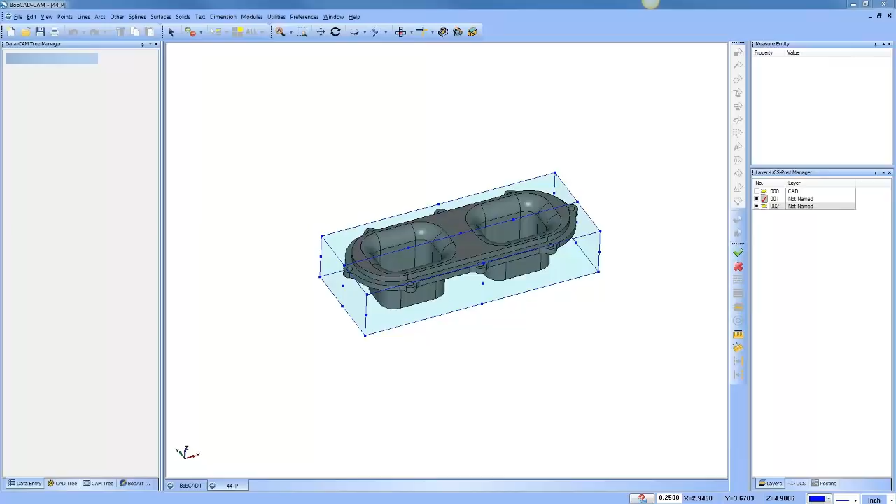The goal of today's webinar is to learn the basics of 2D machining or 2D milling.

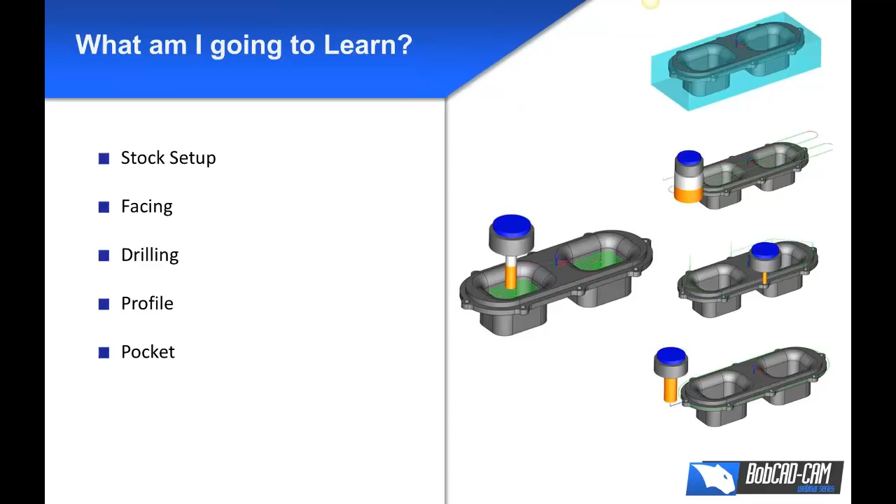We're picking up part 2. We did the wireframe to solid webinar, then we did the 2D milling last week, but we kind of ran out of time, so I want to spend a little more time this week. With BobCAD, you can always expect fewer steps, better cuts, and more profit.

While I'm getting my screen set up, why don't you give me a little shout out? I have Erwin here from New Jersey. We have Doug, thank you so much for joining us from Seattle. We got Rick in Tampa, Larry in Illinois, Reginald out of San Diego, Tom in North Carolina, Ron out of Pennsylvania, Mike, Dale, Vic from Ohio. I appreciate each and every one of you spending time with me here today. I know you guys are busy, and time is money, so I appreciate your time. We got Jamie from Austin.

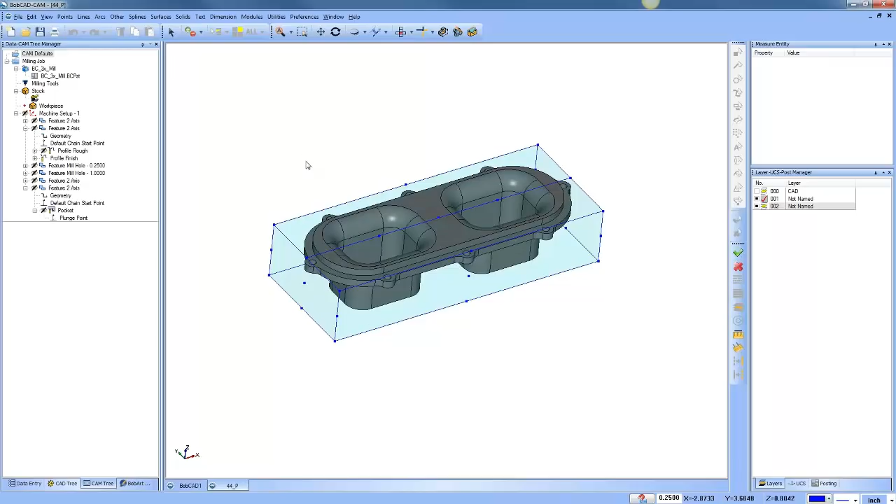Okay, so where are we at? What I'm going to do is a little review here. I'm going to take our model, copy it, create a new file, and paste our file in here. Okay, so we have our model. Again, if you want to rewatch the CAD webinar for this, if you request it, I'll make sure to email you a copy of the first stage where we created the wireframe and turned this into a solid.

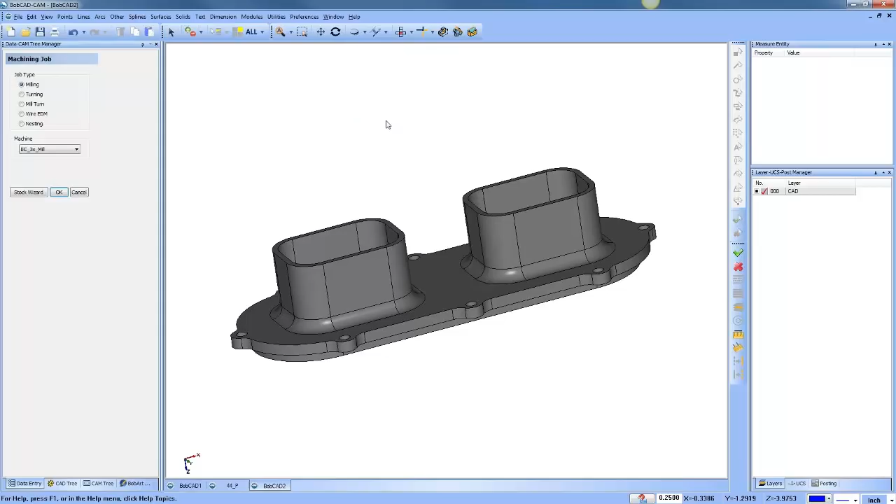So again, we're talking about 2D machining features. This part has some pretty prismatic type shapes - pockets, profiles, radiuses - not super complicated geometry, but always a really good place to start when you're getting familiar with the program and learning about its workflow. If you start with 2D machining, I think that really helps out.

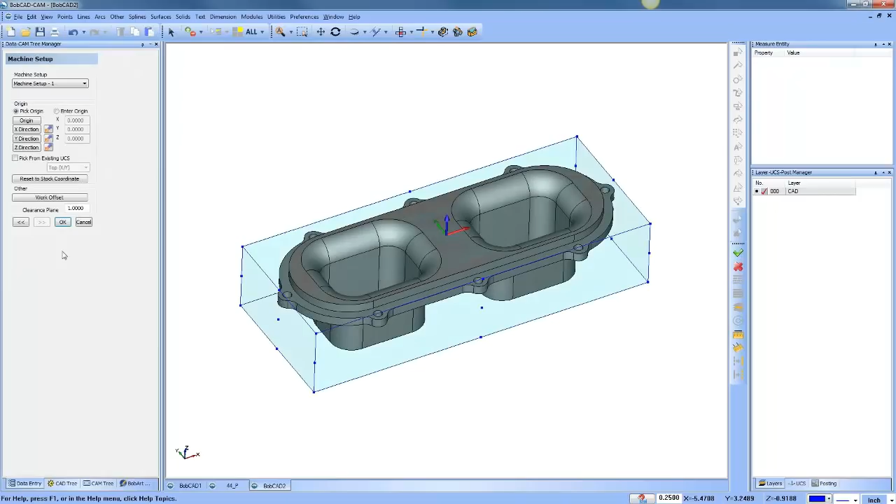All right, let's see here. So with every job, you've got to run the stock wizard, so we'll run the stock wizard through. We're going to come in and set our zero - our zero is going to be on the top of the part. That's fine. We're going to blank our stock out here, and we're going to talk about some 2D machining right off the bat.

Let's talk about drilling for a second. If we wanted to - yep, no problem, Marty, I'll send you a copy of that. Just make sure you give me a valid email address, and I'll have that emailed to you after today's webinar.

All right, so we got our stock set up here. We have our milling job, our stock set up, and our machine set up here. So now we're going to start loading in features, and there's a lot of different features you can pull in. We're going to go with mill, drill, hole. From here, we're going to choose select geometry, and from select geometry, we can start picking different parts of our geometry we want to work with.

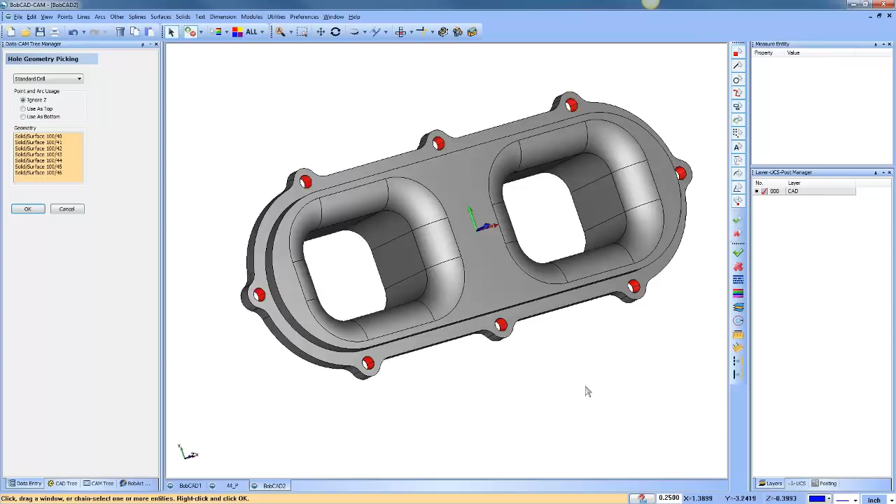We can pick cylindrical faces - if you have a solid model, you can come around and pick the cylindrical faces you want to work with. The good thing about working with cylinders like this is the software is going to read the top and bottom, read the diameter, read the depth, and also read the top of feature - this value right here. Let me highlight this. This top of feature value is coming directly off the surface model.

So that's important - if you're drilling holes and you have a solid model, and you select those cylindrical tubes, it's going to read in more information than if you just pick the point location or a section of an arc. That's pretty important. If there's any questions about that, go ahead and let me know. So we selected our geometry, we have our top of feature, we have our depth.

Now, we may not want it to start at that shoulder.

Maybe we're going to drill these holes. Let me cancel out of this. When we look at our process plan, you're going to look at the tools you're going to use, the order in which you'll use those tools, and how you're basically going to cut that part.

A little slower, John asked if I could go a little slower. I'll do my best for you. Robert has a question probably later.

If you have a job with more than one machine setup, can you use the results of one setup as the stock for the next? Yes, Robert, you can export your stock out. But let's get back to that in just a second here.

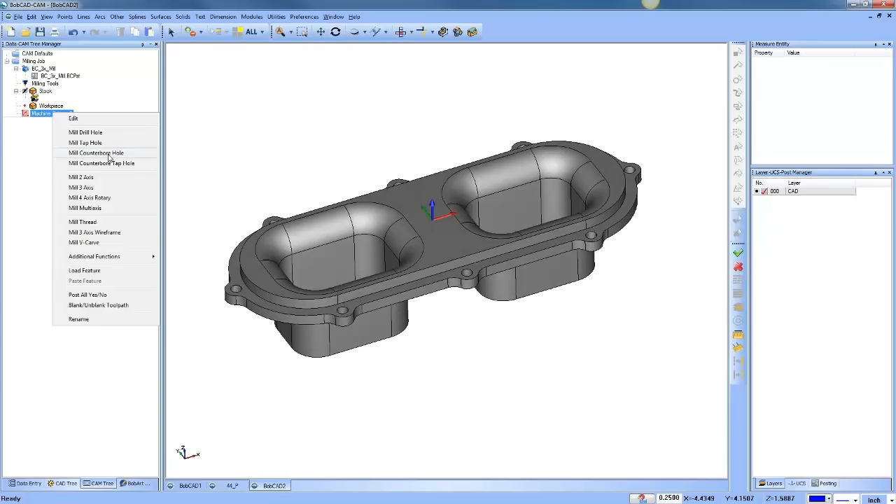If you have a solid model like this, and we're drilling these holes, I'm just going to select one of them for now. If I'm drilling this hole and I select that cylindrical tube, it's going to read the hole diameter, it's going to read the depth. When I go to next, it's also going to read the top of feature and the depth.

If I wanted it to start drilling from 0 instead of at the depth of the shoulder, what would you do? Well, where it says top of feature, I could do two things here. Either I could zero this by just entering 0, and then for the depth, I could set what the depth is. That's one way to do it.

Another way to do it is I could say pick top, and then I could pick where I want the top to be. And then where it says depth, I could say pick bottom, and then I could pick where the bottom that I want to be. So you could either enter or select that right off that model.

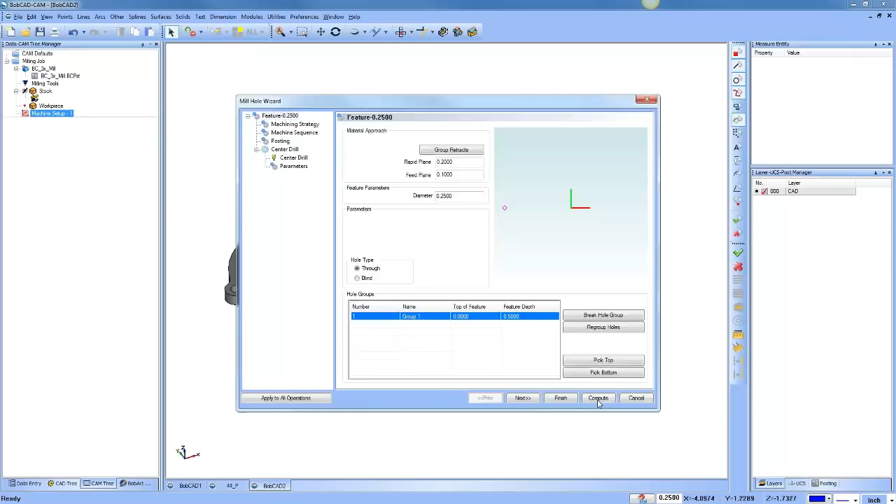All right, we compute this. Now we can see that our spot drill is going to come down, and it's going to spot this and come back out.

So let me go through this again. Let's delete this feature here. We're going to right-click on the machine setup. We're going to go to Mill Drill Hole.

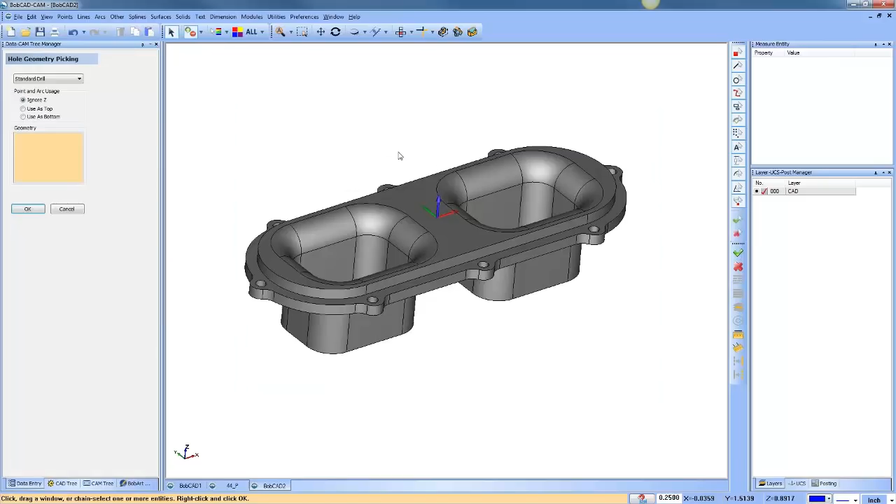We're going to select Geometry. I'm going to select this one, here. Sometimes when I'm trying to select these holes, I'll hit T on my keyboard for transparent. The reason why I do that is as I highlight over the holes, it makes it a little easier to see when it's been selected.

Okay, so I got that going. I'm going to say OK. We're going to choose next here. We're in our hole group. For my top of feature, I'm going to set that to 0. For my feature depth, I'm going to set that to 0.5.

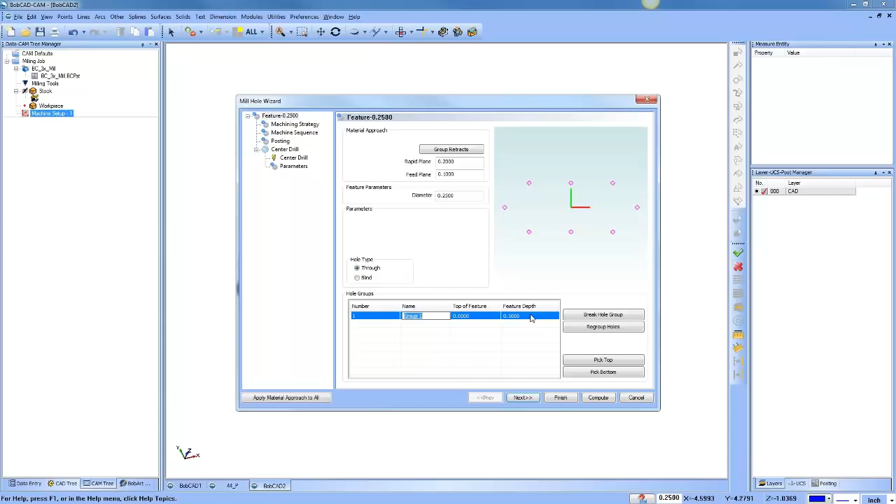Top of feature is where you're going to start cutting from. Feature depth is the incremental depth value, which you can enter or input. So we have this set up. The next thing I'll do is go to my machining strategy. I'll go to holes, so I have a spot drill and a drill.

I'm going to recompute, and now we can see our dotted lines. We can see it's starting at the top and it's going down. Now, if you want to get a view of what's going on, if you want to see where the tool starts and see how deep it's going to go, that's where we're going to come over into our feature tree, or our job tree, and we can click on one of these operations and right-click and choose backplot, and then that way we can see our tool.

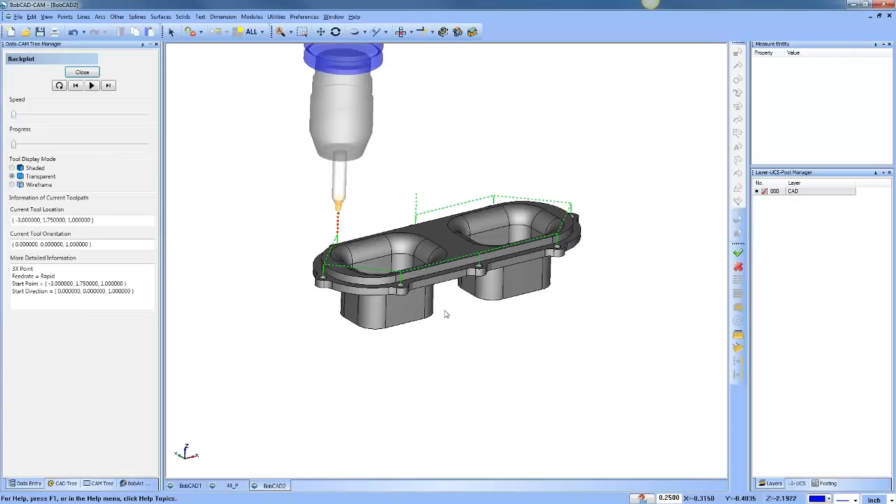Now you can hit Control-1. If I click into the CAD window and I hit Control-1, that will give me a top view. If I hit Control-2, that will give me a front view. Once I'm in a front view—I'm sorry, it's Control and then the number 2, Control number 1, Control number 2.

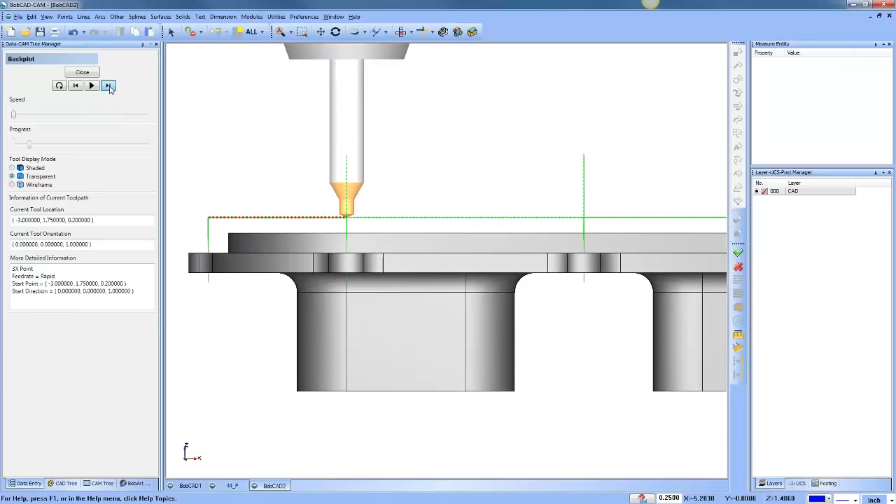Okay, so once I'm in a front view here, I can click through and see exactly where the tool is going to go. This is a great visual aid to really help you see what's going on.

Okay, so we have our feature here. If we highlight our feature, it will show a preview of our feature. It shows the depth, it shows where it starts cutting, and it also shows where it ends cutting. That's a very useful way to gauge exactly what's going on with your part. If you highlight or select your feature, it will preview where it's going to start cutting and where it's going to end cutting.

A couple of questions coming in. Vic said, that step next to the drill is precisely why I like to default Z to 2 as a rapid plane. You will dogleg that part in the rapid move. Yes, so if you're unfamiliar with dogleg rapids, that can be a problem because you're not able to accurately see where the dogleg is. So Vic makes a great point.

What he's saying is, in the machine setup here, his clearance plane, he wants this number to be 2, so that way he keeps the tool away from the work holding or the part geometry when it goes in between features.

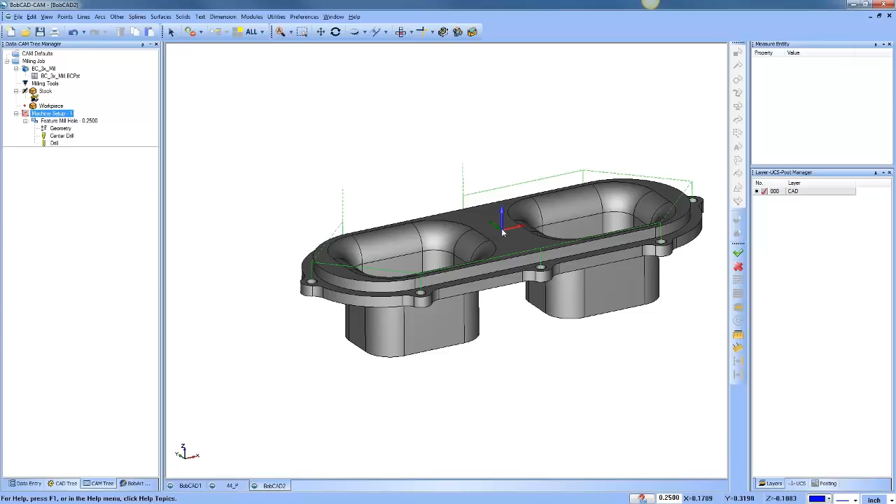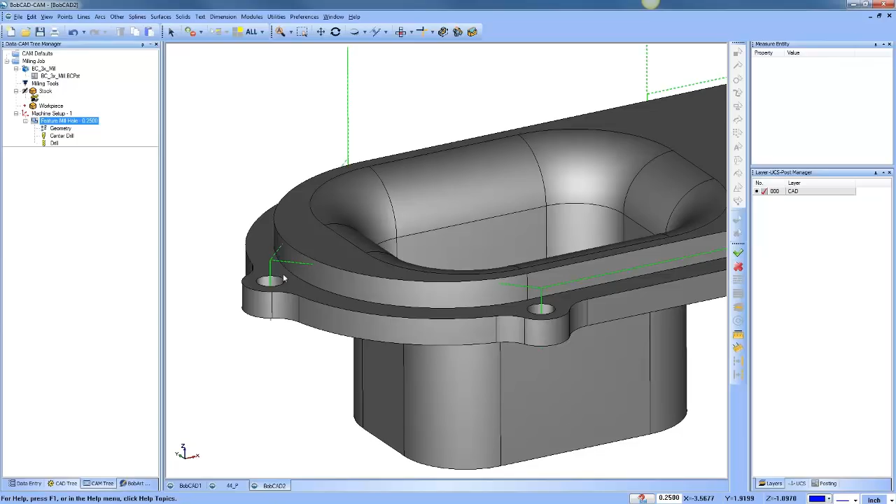Now, something that I normally do if I'm going to have a negative top of job - like this is my 0 position - if I wanted to start at the bottom of the shoulder, we come back in here to this feature and make this a -1/4 inch, and then set this one to a 1/4 inch, right? What I want to do is get that tool to come back up higher. You can see right now how the rapid plane isn't high enough to clear the top of the part, and this is exactly what Vic was talking about.

Hey Mark, how we doing today?

So this is exactly what Vic was talking about, where I want to make sure that my tool is going to go up further. Now, what I personally do in most scenarios, if I have a negative top of feature here, I generally add that to my rapid plane, whatever that value is. So I'll just plus 1/4 inch, making sure that the tool is going to come out further up. There are some other settings you could use specifically for drilling, whether you're in a G98 or a G99, so those will play some roles as well.

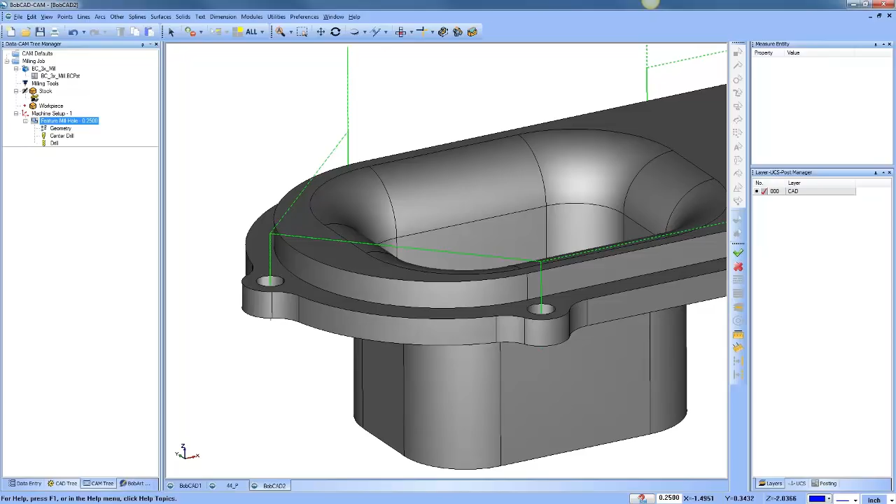John has a question: does that add drill point? John, I believe what you're asking is, does it have drill tip compensation? The answer is, for the spot drill or center drill, it's going to calculate out your depth by this neat little calculator here, which is very useful. Then the other one is, if you look at your drill parameters, you have the effective depth and the overall depth. The overall depth - this value is what will be posted in your G code, okay?

And that overall depth, there's a couple of things that are happening, whether it's a through hole or a blind hole. But yes, your drill tip compensation will happen there, and you can see that with the overall depth. So the effective depth would be when we're at this level here, and the overall depth is when we get down to that point position. That's where that would be.

Okay, let's go ahead and clear this and go back to normal selection. Mike has a question: is there a way to make the rapid plane absolute?

There isn't a way to make it absolute at this time. So what Mike's asking is, this rapid plane right now is an incremental number from top of job or top of feature - from top of feature, we go up incrementally. This value, he's asking if that can be made absolute. At this time, that is not an absolute setting. Okay Mike? All right, very good.

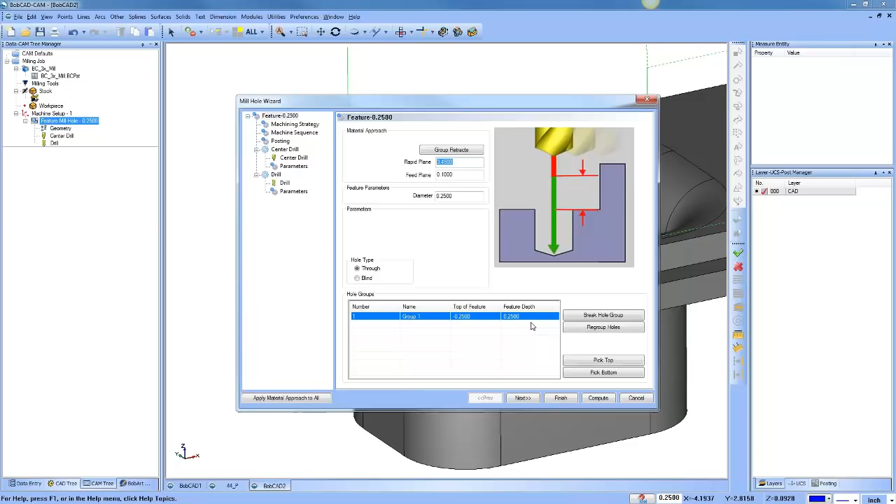Okay, so we drilled our holes. We talked about some of the things that are going on here. The next thing I really want to talk about is when we're drilling holes, we may use holes as pilot holes, or we may want to make these like start positions. So what I'm going to do is drill a hole in the center of these two pockets here, okay? I want to drill a hole there, and then I'm going to want to profile starting in that hole and work its way around.

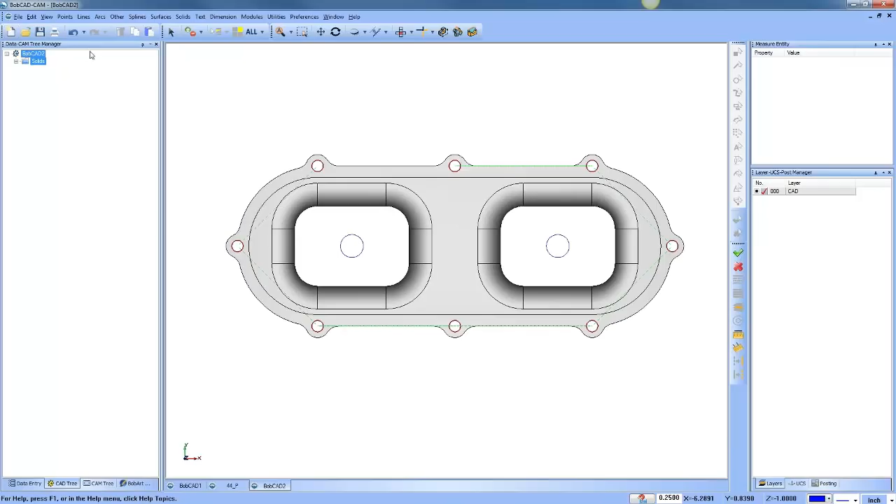So how would we do that? Well, one of the things we need to do is get this hole location. You could come in and do an arc and sketch, do a fixed sketch, and use some of the snap points set up in the software to pick a position. That's one way you could do it, but it's not quite as accurate, so I probably wouldn't do it that way.

Another way I would do it is to create a construction line from end to end so that I could snap to a midpoint. So how would I do that?

I would go to Utilities, Extract Edges, Single. I'll pick this face here, hit my space bar, and then hit Cancel. That's created the wireframe for that face. Once I've done that, I can do a line join, going from here to here and here to there, and that will create your center line. Then from there, you go arc, snap, and snap a hole right at the center of that.

So you can convert your surfaces to wireframe, and then from your wireframe, you can use that as construction geometry to create additional hole locations.

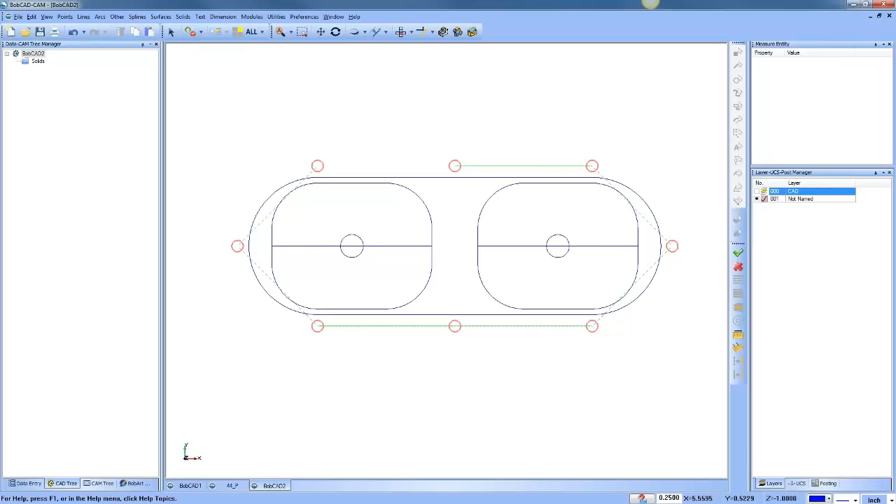Mike has a question: where did you extract to? So when you extract geometry or extract wireframe, in SolidWorks they call it convert entities—it's the same type of feature. Other CAD-CAM systems will have an extraction or conversion method. We call it extract edges. You can find this under Utilities, Extract Edges, and you can do single or solid. In today's example, we're doing single.

So we have our layer system, or level system, over here. Layers are like pieces of paper—you can create more pieces of paper and turn the visibility of them on or off. What I do personally, when I create wireframe off a solid, is convert it and put it on its own layer so I can isolate it. I really like to isolate things; it makes it easier to see what's going on.

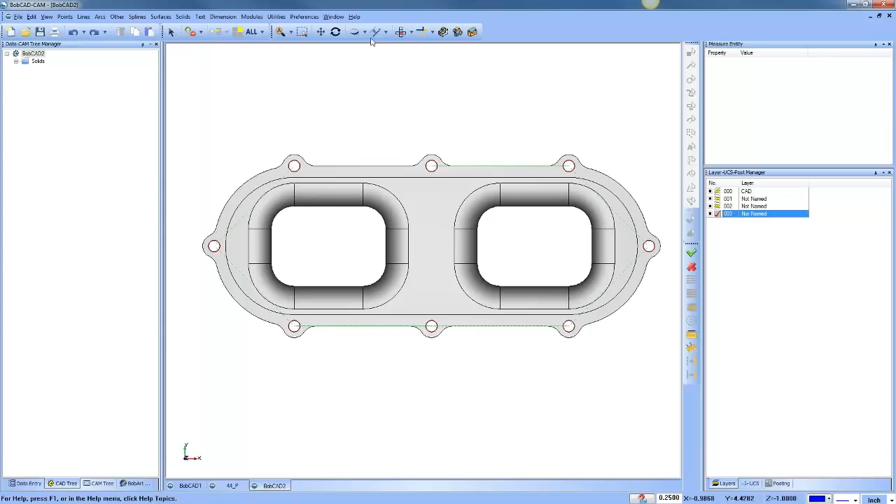So I'll right-click in the layer area, choose Add New Layer, and then make that layer active—that's the active layer I'm drawing on. Then I'll go to Utilities, Extract Edges Single. Using Extract Edges Single, I can pick a single face that I want to work with.

In this example, I'm just going to hit my center mouse wheel to rotate. I'll move my mouse over this face here, left click to highlight it, and then hit my space bar to lock it in. Then from there I can turn off the visibility of the other layers.

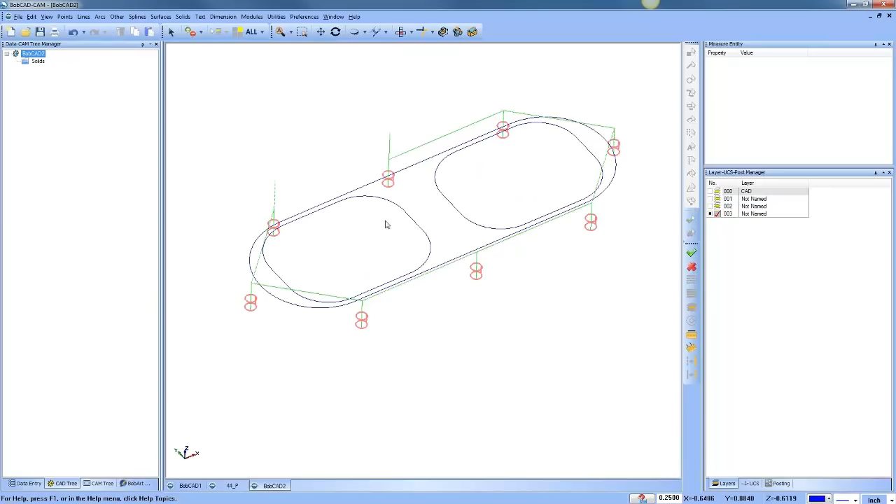Control 1 gets me back to a top view, and now I can continue my layout here. I'm going to grab this one, and grab that one—arc, snap, maybe it's a 1-inch hole we want to work with. Boom, boom, and then cancel.

So now I've added some additional geometry to give me a drill hole in the center of these pockets. I go back into my CAM tree, right-click, mill drill hole, and we're going to do select geometry. From here, we can pick this hole and that hole. We'll choose OK.

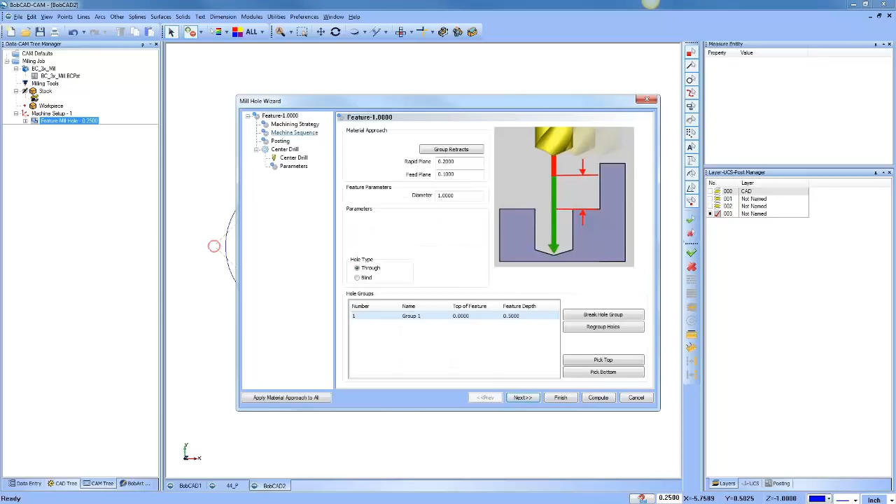You can see it reads the hole diameter, but when you're selecting wireframe, it will default to a 1/2 inch depth. We can either pick or enter our depth—we're going to leave it at a 1/2 inch for now, then choose next. We've got our hole cycle here. We'll compute it, and that's going to go ahead and spot that hole like this and like that, and then drill this hole like this and like that.

Okay, I want to pause here for a second. Another big area—we talked about the stock setup, we're going through some different features, and again, any questions you guys have, just throw them out. But another thing I wanted to talk about has to do with machining order—the order in which your tool path is being generated.

So without changing any other settings, I'm just going to launch simulation. We'll go to Modules and then Simulation.

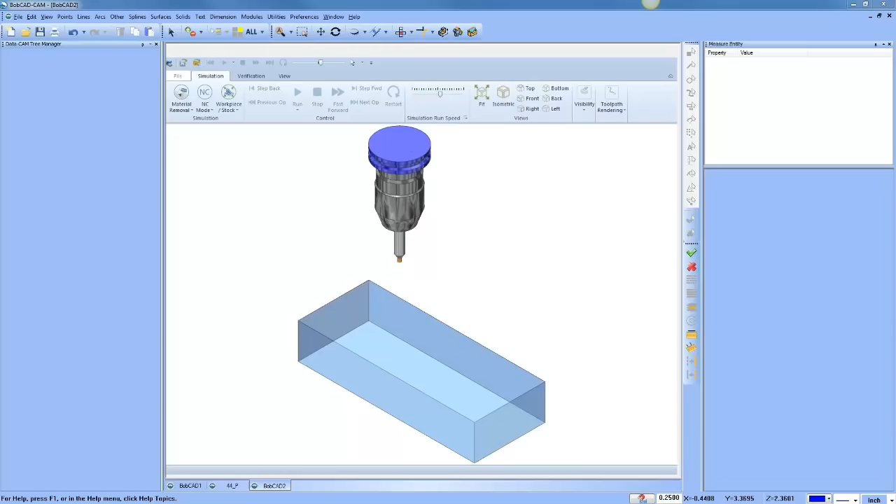And then from here, we'll see our tool and our material. We can slow this down and press play. What we're going to see is we come in and spot, then we spot the other holes, then we drill the outside holes, and then we drill the center holes.

So the point I'm bringing up here is that even though we have two machining features, we still posted the spot drills at the same time. So why did that happen? Did we want it to happen that way, and what are our options with that?

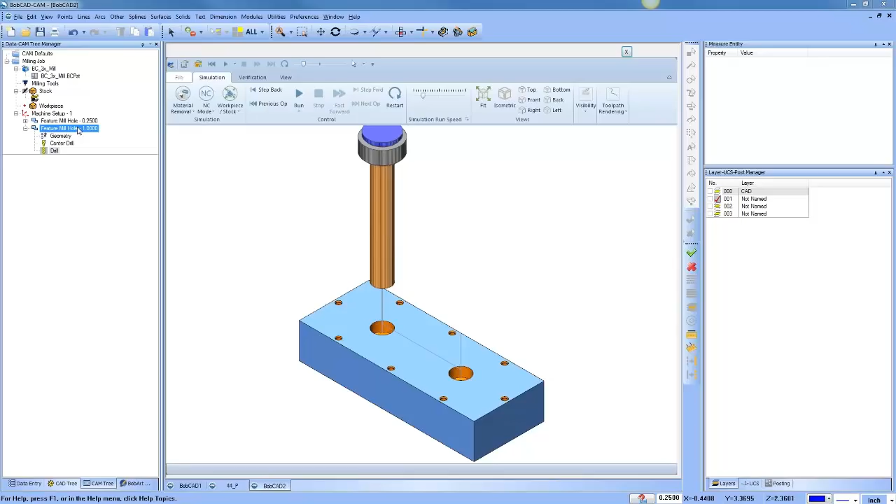If we close this out and go up into the CAM tree, go to our milling job and right click, you're going to see machining order. Machining order is the order in which your operations will be posted.

Now there's three types of optimizations: individual feature, individual tool per machine setup, and individual tool which would be tool dominant across multiple setups. With individual tool selected, the first tool that is called will look through the entire CAM tree to find other instances of that tool and post it together. The idea behind this is to limit tool changes.

So you can see we do our two center drills, then our drill and our drill. Oh, that's a great question - can you reorder these? You absolutely can. You can select one of them and use these arrows to change the order in which they're going in.

Now, I can't have it spot drill after the drill. There is some logic built into this, so I wouldn't say it's foolproof, but there's some logic in here that makes a little more sense. So yes, you can change the order.

You can have it set to individual tool, which is optimized for tool changes, but you can also have it set to individual feature. When you do it by individual feature, it will post in the order that those features are in the CAM tree.

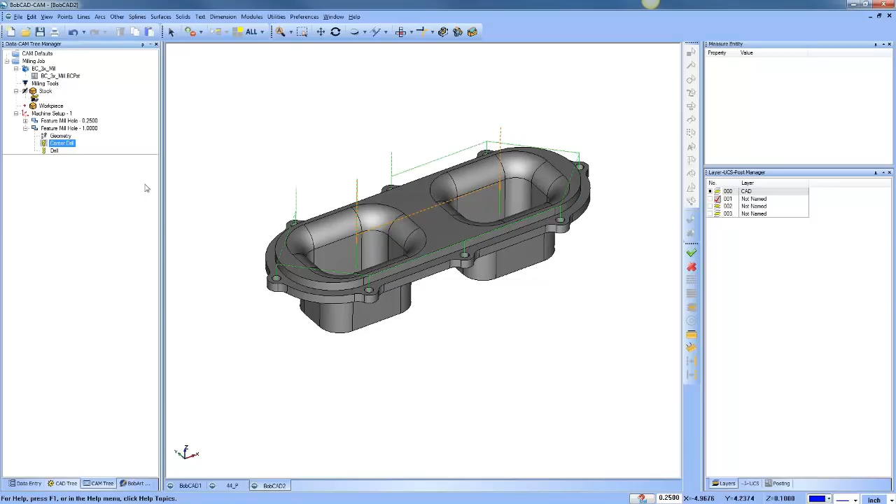Jerry had a question, show how to reorder the operations in the tree. I think that's a good question too. If you want to reorder the operations in the tree, you can just click, hold, and drag, and you can drag these in different orders.

The one thing you may run into, Jerry, when trying to reorder them is if you are trying to take one and put it up at the top, it doesn't work that way. I can't take the 1-inch hole and drag and drop it to where the 1/4-inch one is, but I can take the 1/4-inch hole and drag and drop it to where the 1-inch was. So for the top feature, you need to come down - the rest of them will go up.

Tom has a question: is posting again needed when changing machining order? Yes, yes. So the workflow is you get your CAD preparation.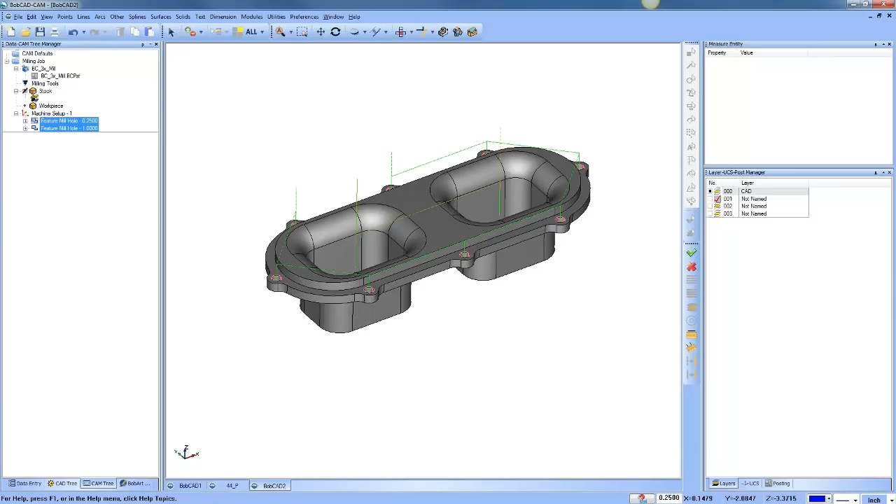So you draw the part, measure it, put geometry on certain layers to help with your process plan. Any construction geometry you need, any measurements, anything you need to do, that's in the CAD prep. You can do CAD prep in process, or you can do it at the beginning of the job.

The next thing you do is get into your CAM tree, and from within the CAM tree you set up the job, set up the stock, set up the zero. So now you've got your stock and zero set up. You may come into the tool crib and load a tool crib of common tools that you may use in the shop.

You may start adding tools in from the tool library. It depends on the job you're working on and how many jobs you program a day, that kind of stuff. So you get your tools set up, or not, but you have your job set up, you have your stock set up, and you have your machine set up.

Your job is the machine and post-processor. Your stock is where the material is, and your machine setup is where your origin, or zero, or work offset is. Now that you have that, you're going to start building in machining features. The machining features are the tools, tool paths, and settings you'll use to make your part.

Once you get that set up, you generally come over and do some simulations so you can visualize what's going on. Once you're happy with that, you may do some reporting. You could generate a setup sheet. You may want to get a little more information about the tools you're using or cycle times.

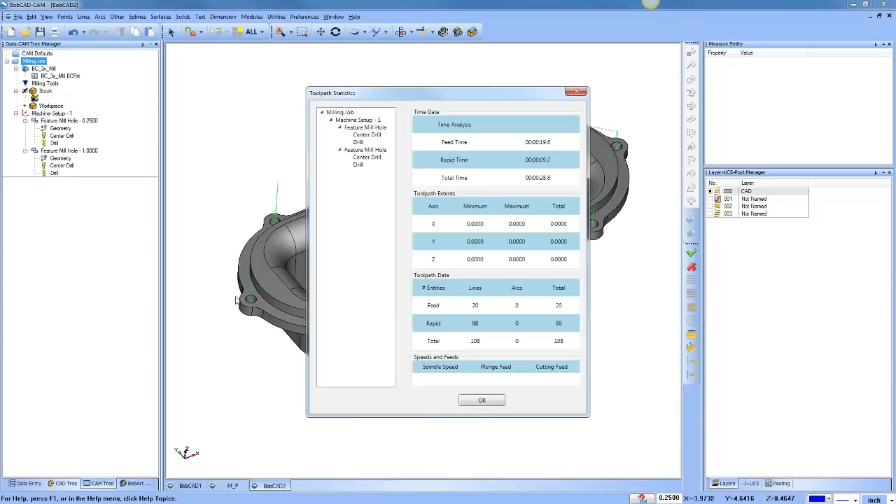You may look at cycle times. You may be quoting this job and not running it yet, so you may come in here to toolpath statistics and get more information about each of the toolpaths and how that's working. Once you're happy with all that, you want to get your G-code, because let's face it, CAD-CAM is about G-code. So you'll come up to your milling job, and then you're going to post this, and that's where you'll write all your G-code.

So Tom asks, if you change your machining order, do you need to repost? And the answer is absolutely. Because once you post your code, this is the end result — it doesn't go backwards. The code doesn't go back into the tree. All of this is to produce the code, and the code is the last thing you get.

So if you want to change the order, we can come in here to our machining order. Maybe we want to go tool dominant here. We'll say OK. So now we've updated the machining order. Then what we would need to do to update the code is right-click and post the code again.

So that's a little bit about the posting order, Tom. Hopefully that made sense. Mark has a question: can we put 6 pieces of stock on the drawing?

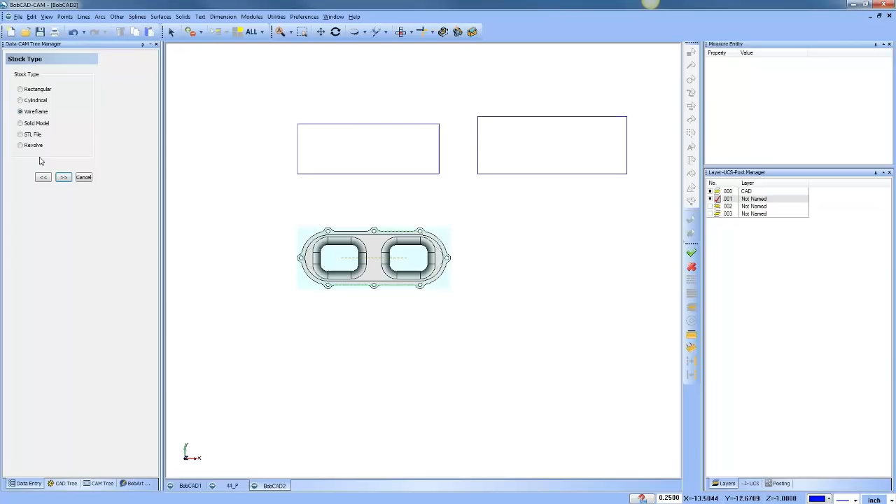Yes, we can. If we're talking about multiple pieces of stock, there's a couple of ways to do this. One way is where you might, and I'll just set a square — I'll do 2 pieces right now. One way you could set multiple pieces of stock when doing the stock wizard is to use wireframe stock. We can choose wireframe, say pick geometry, select our 2 profiles, and from there set the depth.

The problem with using a wireframe for this method, Mark, is they would both start at the same Z level. If we look at this from a front view, we can see the stock would start at the same Z level for both of these shapes here.

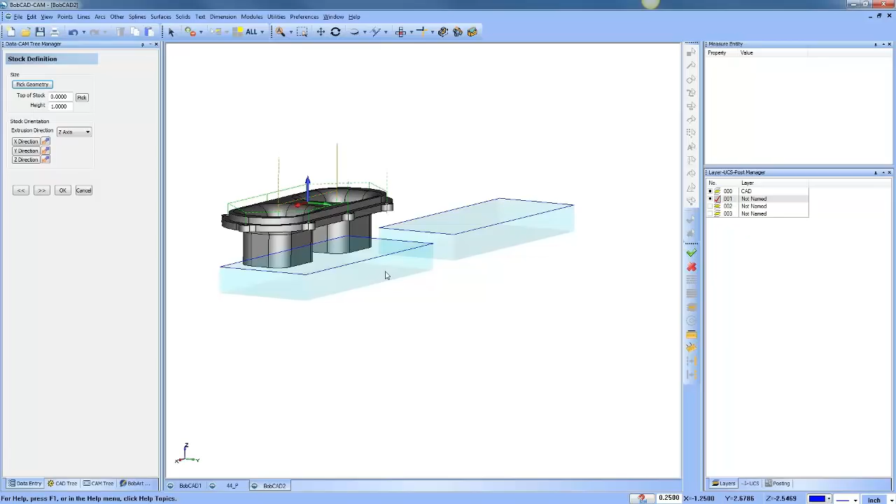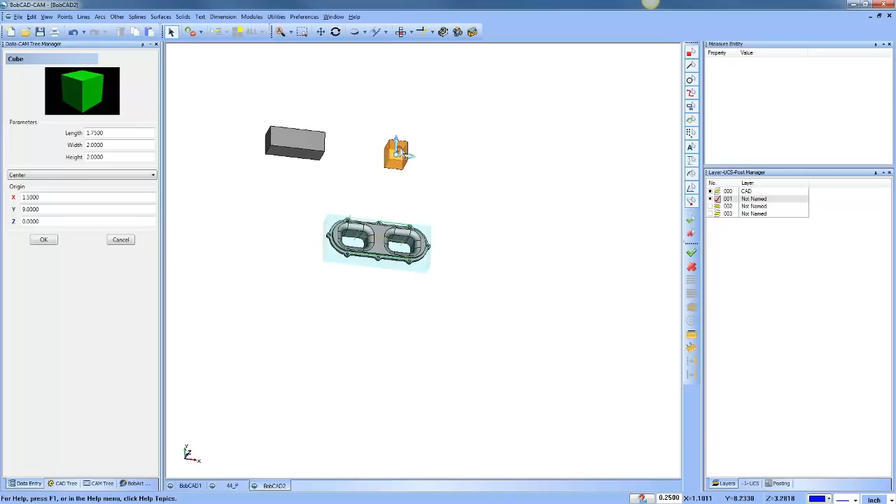So generally, if I'm working with multiple pieces of stock, instead of using the wireframe method, I'll use the solid model method. So here we have one, and then we'll go to this one — maybe this is skinnier and taller. Now I have these two blocks representing my two pieces of stock.

So in order to set the software up so it knows those are my two pieces of stock, I can go to the stock wizard, choose solid model stock, and from there pick the solids I want to work with. Now I have the stock set up based off these solid models, and you can see I have my two pieces of stock there. Hopefully that answers your question, Mark.

So let me do this — let me run the stock wizard again. We'll go back to rectangle, and everything looks good there. Doug has a question.

Not sure if you mentioned, lots of times I don't want to center drill with a stiff drill like a 1 inch. So you don't have to, when we're drilling here, have a center drill and a drill. You can use the dynamic machining strategies to change that.

So if we go to our 1 inch drill here, we can just go to machining strategy. These are our current operations, the ones we're using to machine our hole, and these are our available operations, so we can add additional operations to process that hole. If we didn't want a center drill or a spot drill, we can select it, exit out, and recompute it. Now you can see our 1 inch drill only uses a drill. Hopefully that makes sense for you, Doug.

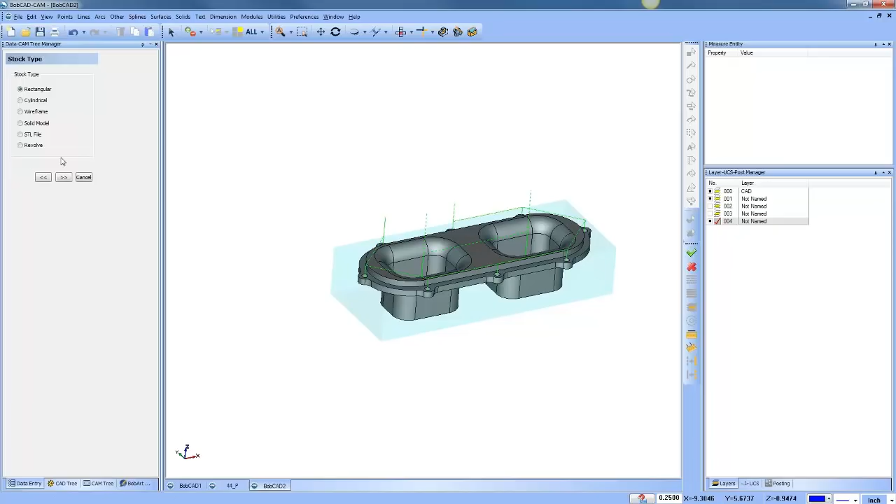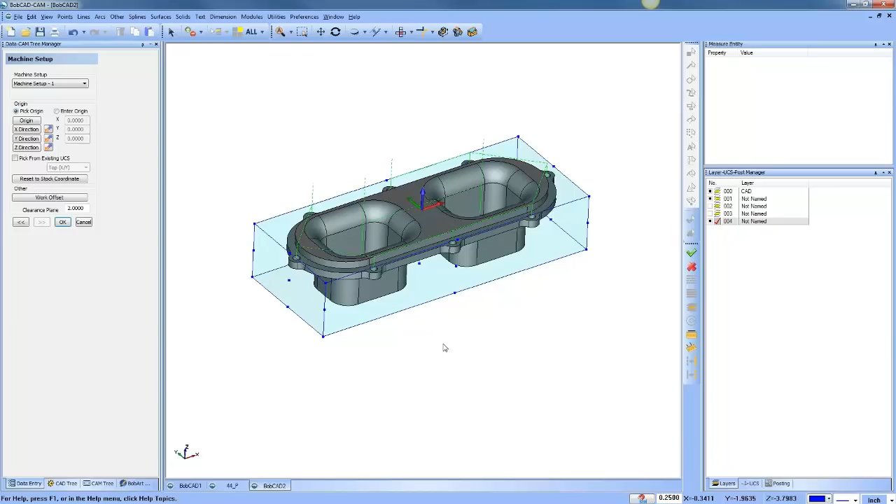Here's a trick, and I've shown this before. I think this is very useful. When we use the rectangular stock type, as we set up our stock here, when we get to the origin stage, a bounding box comes up. So we have the extremes, the outermost dimensions of this stock, and then we have this wireframe. This wireframe is very useful. In our example, you want to use a solid stock instead of the rectangular method here.

So what I'm going to do is just click measure, and then click on this. When that bounding box is open or visible, if you measure it, it will put it on whatever layer is active. So that's a real time saver.

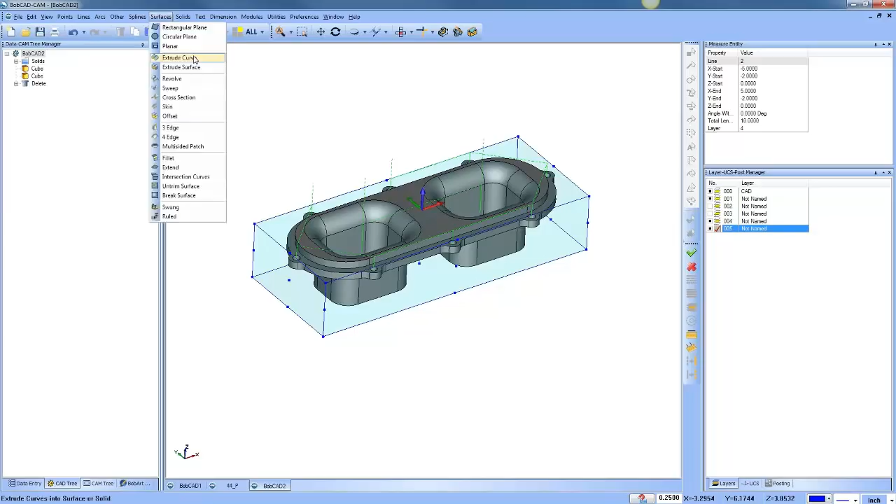So then from there, what I can do is just extrude a curve. I can come in here and select these 4 edges, and now pull this down to whatever size I want. So now that's my solid model. If I want to use that as my stock, I just right click, stock wizard, solid model, next, pick solid, pick my solid, spacebar, okay, and now I've set up that stock for a solid model. Hopefully that makes sense there, Mike.

Humberto asks, suppose I have a cast part and I do not have stock material designed as cast, is it possible to generate stock cast to add some value on all faces of the drawing?

You know, that one's a little more difficult. I guess it is possible, depending on the complexity of the model, Humberto. One way you could do that would be to use a surface, an offset surface. You could select the solid and have it offset out, so that's one way. You might actually run a finish toolpath on it, then rough it out, then finish it, but leave extra stock, and then save the cut stock model out as an STL. That might be another way to do it. So yeah, there's definitely some different workflow there.

Lewis has a question: why is the cycle time always different from what's shown in the simulation?

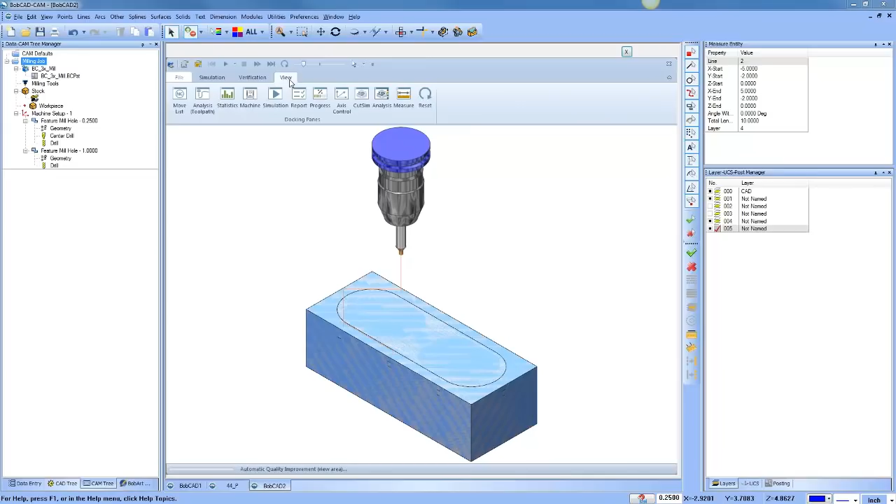The last place, or another place you can find a cycle time, is when we get into simulation. Simulation has some statistics that you can look at. We can come over here to view, and then look at statistics, and this is going to have some information about the cycle time as well. Now, so your question is, well, let me see, operation, what am I looking for here?

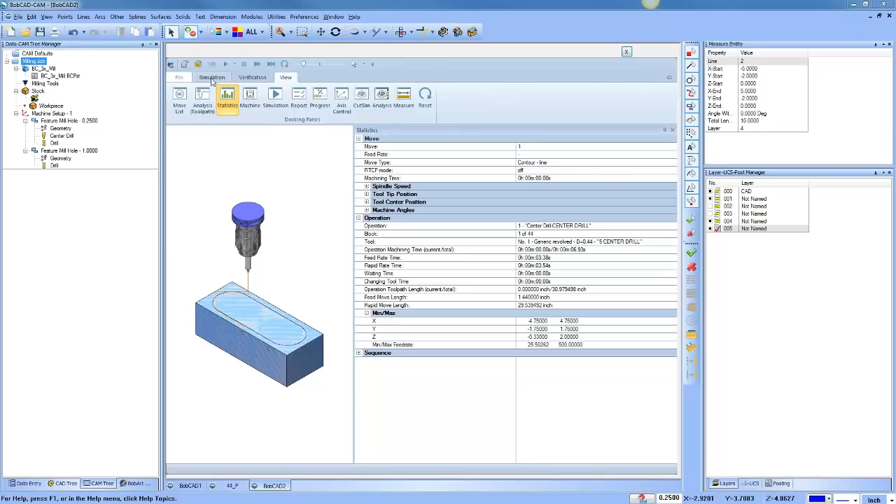Let's go, simulation, next op. Let's go.

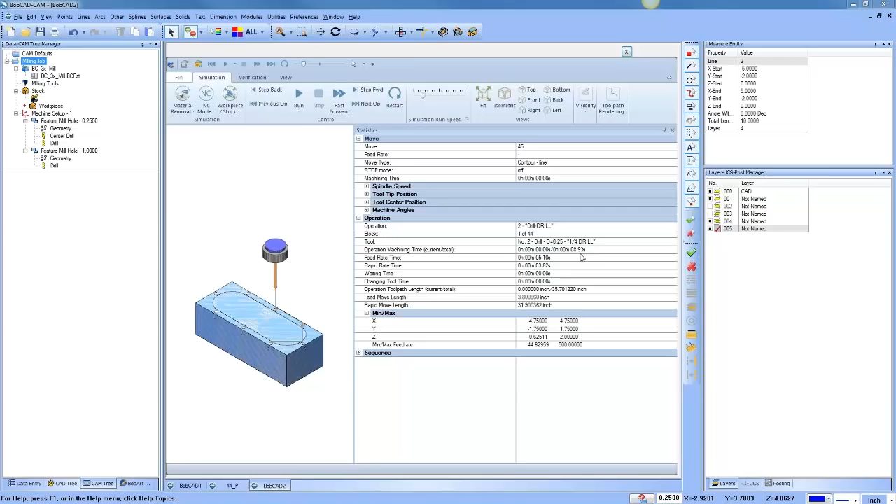Operation drill. This one shows 8.93. One showed 8.7, one showed 8.9, and then the other one went 9. Let me check it again. Why might it look different? Well, there could be different calculations being used or different information being fed, but you should find them all pretty close. Let me see what it was. This one is 8.7, so 8.7, 8.9, and 9, they're all pretty close.

Not accounting for tool change rapids, that is correct. No, rapids are accounted for, Mark.

If you go under current settings for your job, you have your rapid feed here. You also have your maximum cutting feed here, and then your maximum spindle speed. If you have a machine that's over 10,000 RPM, you'll have to adjust this, otherwise it won't post more than 10,000 RPM. Your rapid feed is here, so depending on your machine's rapid feed, that's accommodated for. Your maximum cutting feed rate is used when you're using the adaptive toolpath.

We use this for the non-cutting moves for repositioning. You might cut at 50 inches a minute, but when it repositions as a non-cutting feed rather than a rapid, you don't want it to feed at 50 - you want it faster, and you can use this number here to adjust that.

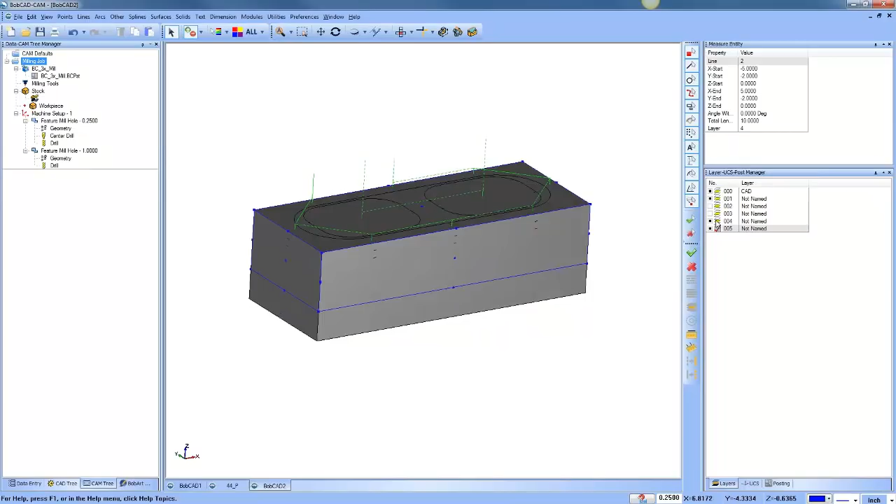All right, let's see here. So we did some stock - let me back up here just a little bit. Let's get rid of some of this stuff. All right, so we'll go back to our model. So we drilled some holes - we drilled like a feeder hole here.

Really, the next thing I wanted to get into is the profile routine. Now maybe I want to profile this, so I'm going to right-click, do Insert Mill 2-Axis, and choose Select Geometry. From Select Geometry, I can do a couple of things.

I talked about this before. Right now we see our feature, like our 1-inch hole feature, being displayed. Why is that being displayed when we're in the middle of selecting some other geometry? Let me cancel out of this. What's happening is wherever your mouse is, like if it's on this feature, that feature will be previewed. If you have that feature highlighted, it will be previewed, and when you launch the next toolpath, it's still going to display.

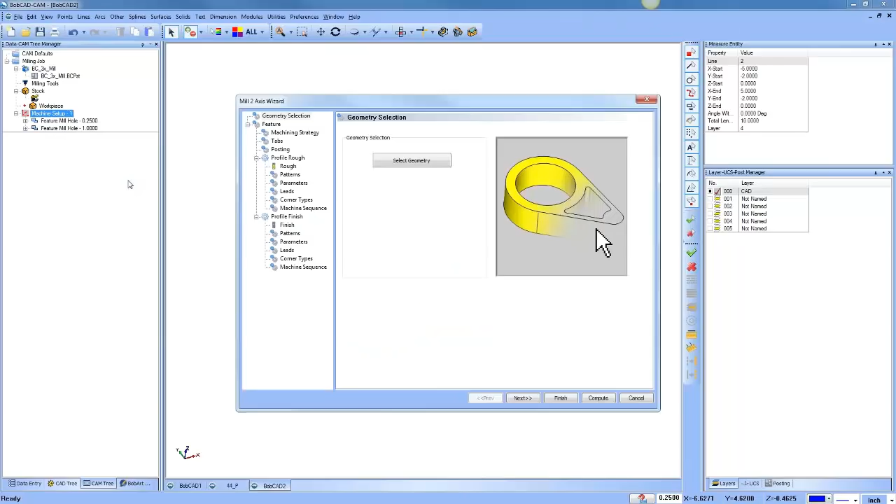So what I recommend is you go up to the machine setup, right-click, and load in that next feature. So for Mill 2-Axis, we do Select Geometry - now you can see nothing is being displayed, so it won't confuse you.

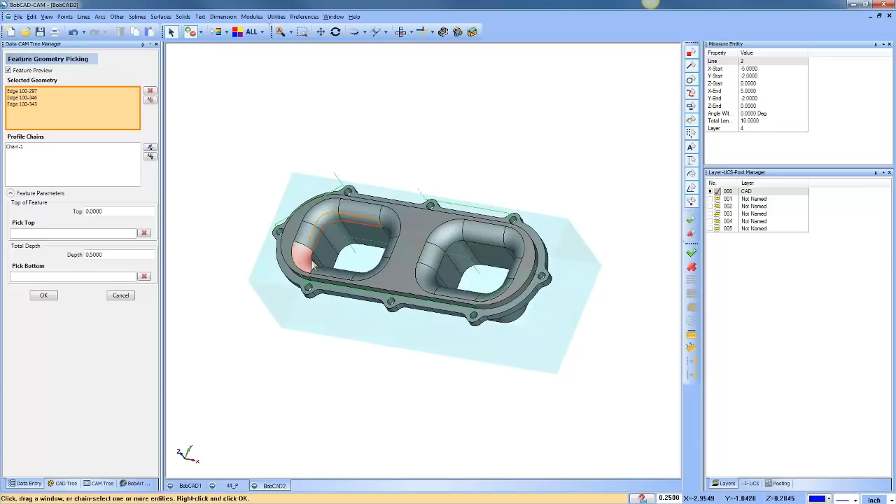All right, we're going to come in - how are we going to select this? We want to select these inside pocket walls, we want to do a profile routine right now. So how are we going to do that? Well, one way would be to click around the edges - we can click one edge at a time and click around, and this will get the job done, but it's definitely not the most efficient way.

You could do that with surface edges or with wireframe - that's one way. Another way, if we zoom in here, is to right-click on this edge and choose Constant Z or Loop. If I choose Constant Z, it's going to be all the geometry that's flat in a Z-plane. If I choose Loop, I'll be given the option to pick either around this surface or around this surface here. In our example, we're going to choose Constant Z - you can see it picks it up all in one shot. So instead of clicking around one by one, use the chain selecting for surfaces if you're working off a surface or solid. If you're working off a wireframe, it's shift-left-click to do a chain selection. But we get this geometry set up here.

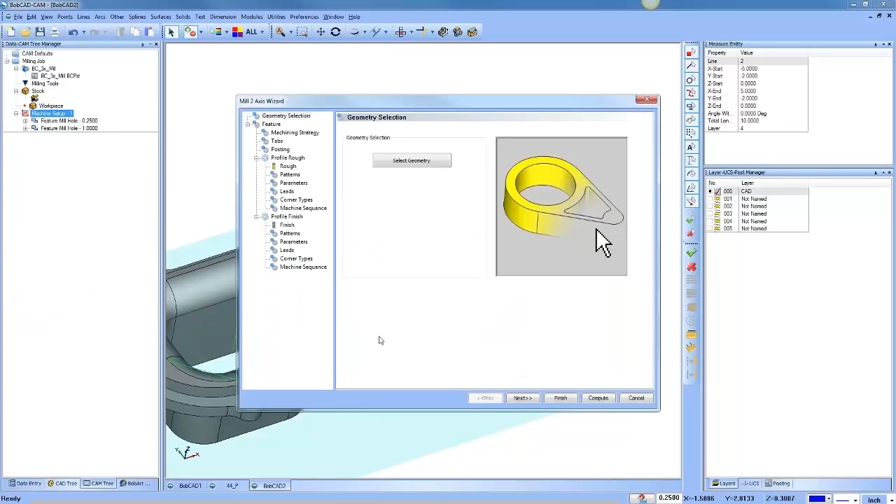We can go in and set our depths, but we're going to leave our depths the way that it is. We'll say OK. All right, so now we've gone through, we've selected our geometry. We're going to look at our machining strategies. I'm just going to look at a profile rough right now.

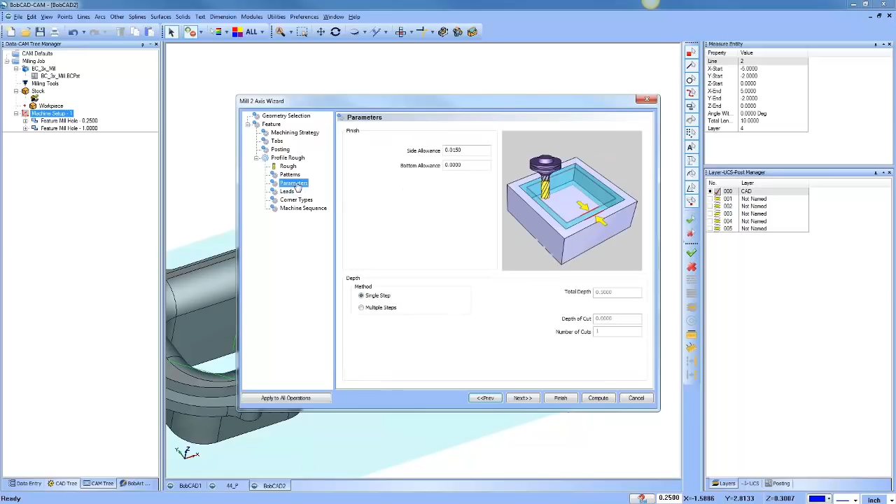Next, we'll come in and pick our tool size. We'll look at some of our patterns. We're going to do a standard profile to begin with. We'll look at our leads here. How are we going to come into the wall? I'm going to do like a blend maybe. So we'll do a blend here, and then we'll compute.

All right, so when we do this, you can see that the tool is going to lead in. So we're going to backplot here. The tool is going to lead in, and then it's going to work its way around, and then it's going to come back out.

Now one of the things you'll notice is that I have the drilling cycle being displayed, and I have this profile being displayed. So I'm getting a lot of toolpath on the screen, so it may not be clear exactly what's going on, which is again why I would isolate. One of the ways you can isolate is by blanking or hiding your toolpath. So you can right click on machine setup and go to blank toolpath, and that will hide all the toolpaths that are on the screen.

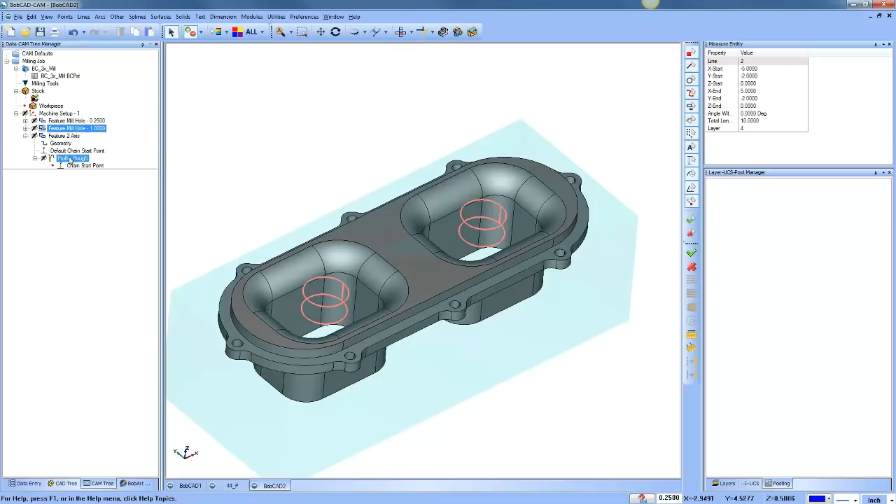And then you can click on one of the toolpaths or operations at a time and be able to just display that operation. Now if I look at my drill hole here and I look at my profile here, you can see that this is starting close to the center. At this time, let's go to this one here. You can see that it's close to the center, but that's just the way the math worked out.

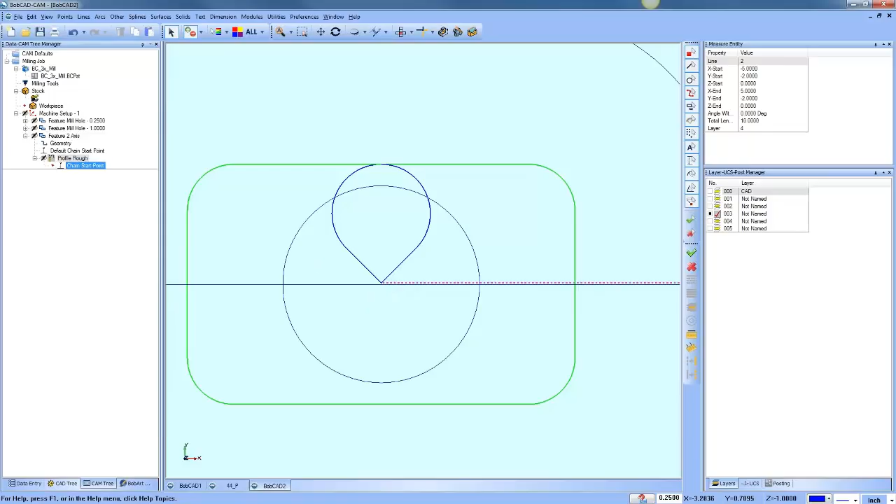When you're looking at your lead in and lead out options, you can just come into your leads and look at these settings here. Sometimes you need to do a little math to get it to go where you need it to be. In this case here, by setting it to 1/4 inch, it's definitely closer to this wall. If I want it closer to the center of this, I can edit this, go to my leads, set what my lead value is, and recompute.

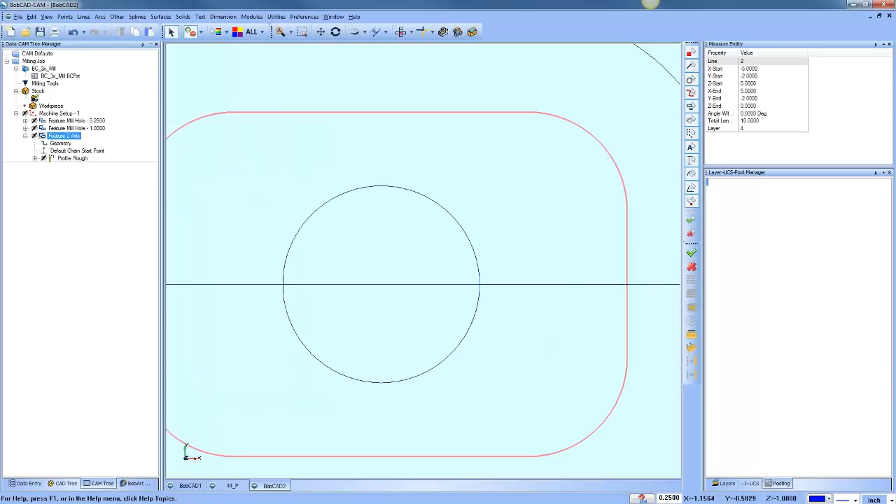Now you can see that's still closer to the center. It's not exactly in the center. You can do a little math to figure out the exact center to get it in the center for that hole. On this shape here, we have it come down, and then it's going to go around, and then it's going to come back out and move over to the next one.

If I want to change my start point location, maybe I didn't want it to lead in from here, maybe I wanted it to lead in from this wall. How would we do that? If we go over to our default chain start point, you'll see that there is an arrow here.

Some of you may be asking, well, why is the lead in over here if the start point is over here? Well, there is some gouge protection that occurs, so it will move it if it's finding what it deems as a gouge or a potential gouge.

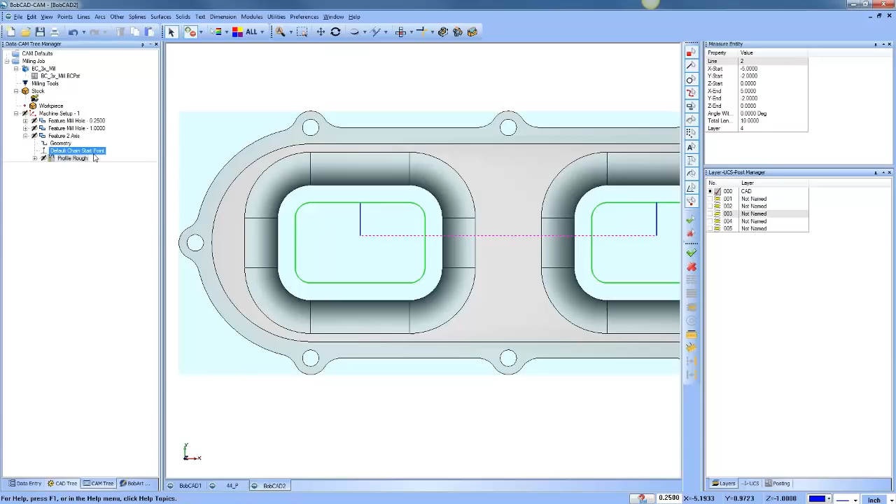But in order to move it, we just right-click and choose Modify, and then we can click on the middle of the line or the end of the line or 0, 45, 90, and set where you want it to be. This arrow is indicating where it will lead in from.

So I moved it to here. I'll hit my space bar or right click OK to lock it in. I'll recompute, and you see that it moved. If I right click, modify, I move it to another location. Compute, you can see that it moves. So that's the way that you can move it.

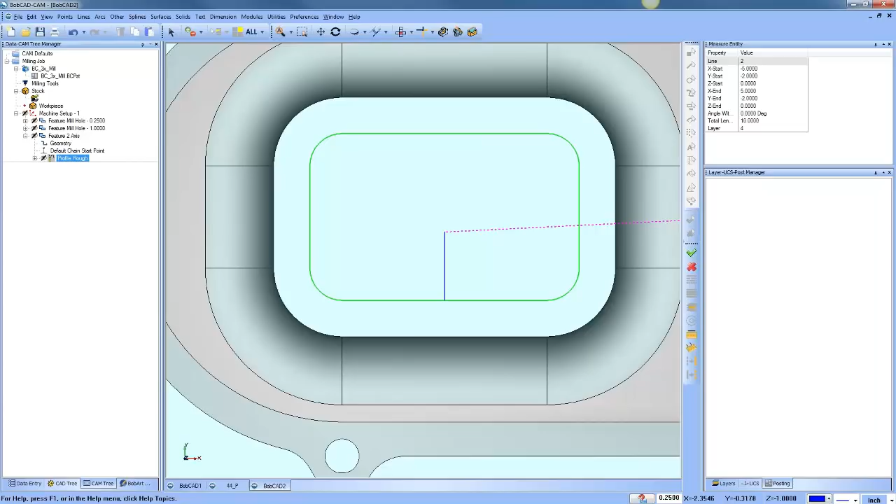Now, on your inside shapes, a lot of times it will select in the proper direction for climb milling. On your outside shapes, a lot of times you just need to reverse it.

If you want to change what direction you're cutting, you can click on the arrow itself and that will change its direction. Or the other thing you can do is right-click on the default start point and choose reverse direction.

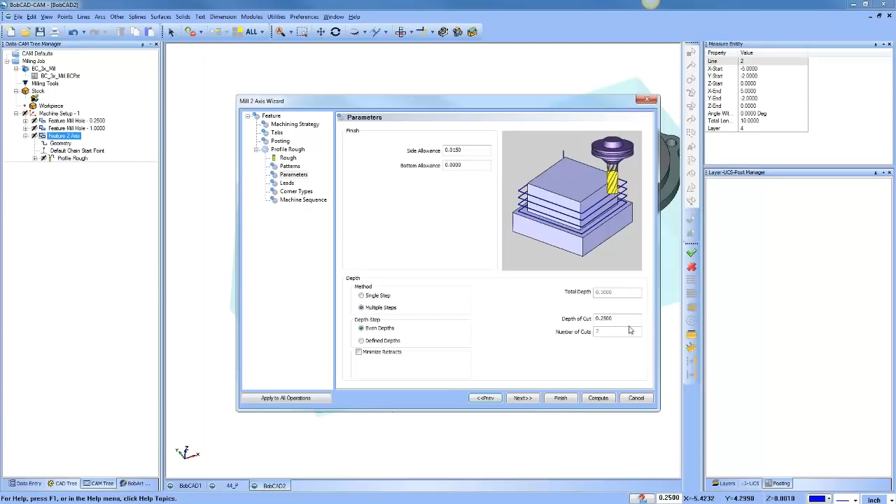Okay, so here we have our two profiles. Right now we're just doing it as a single pass. So if we come in here and edit this, we could say parameters, and then we might want to do multiple passes. You can adjust how much it takes per pass here, so that way you can make multiple cuts.

Is there a way to have it branch in different locations other than clicking each individual piece? I'm not sure what you're asking there, Mike. Are you talking about the selection or the lead-in position? If you can add a little more detail, that'd be great.

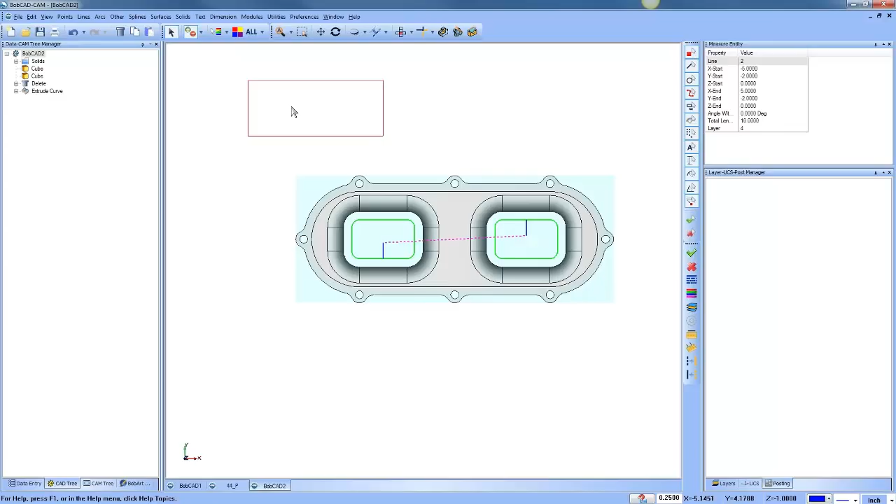Now Erwin had some more questions about the machine setup location here: the easiest way to set up multiple parts, various vices, various positions, currently using setups. Okay, I don't know if I'm going to have enough time for you on that one, Erwin, but I think you did put your email in there, so we could talk about that more one-on-one, or you could join the BobCAD After Dark group and post a question there, and I'll be sure to answer it as well.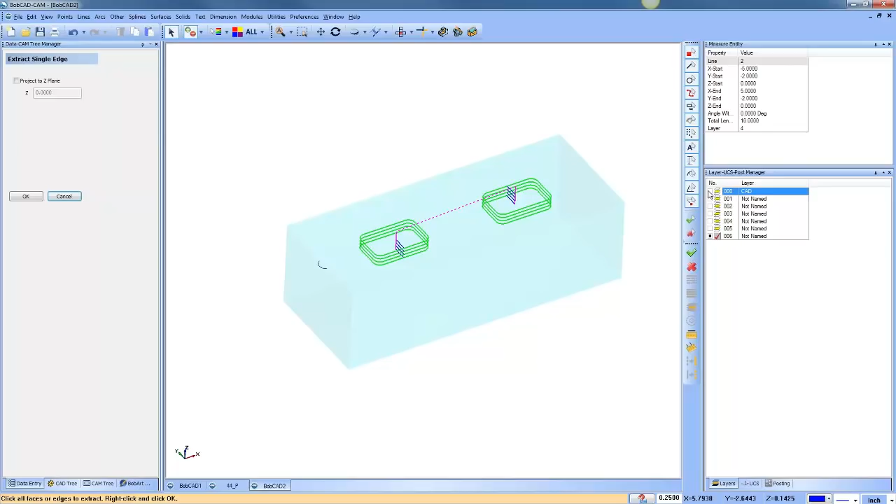If we go Utilities, Extract Edges, Single, and we pick on an edge here and hit spacebar, then that edge will be extracted at its location.

Now, if we use Project to Z, we could select this edge, and that edge, and maybe this edge. What it's going to do now is actually put them all on the same Z level. So you can see these are all now, even though I picked them from different Z levels, it will put them all on the same Z level, which will make it easier to do a chain selection, to change to different corners, etc. Hopefully that answers your question there, Mike.

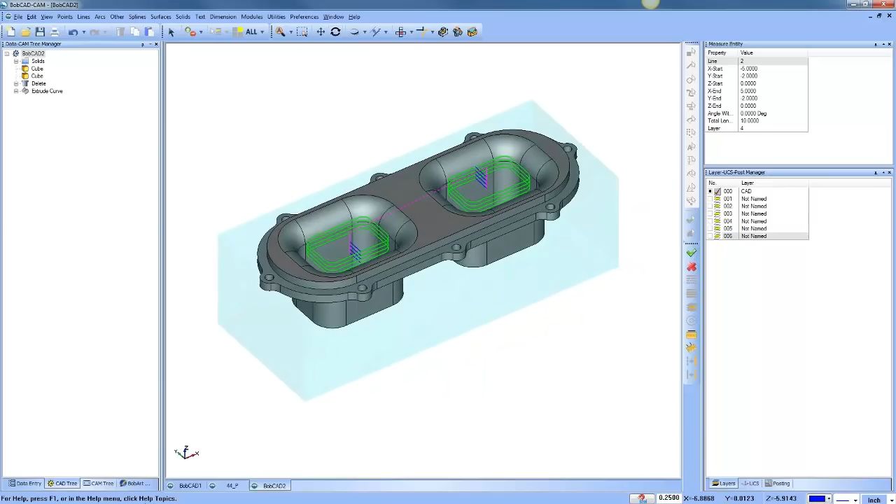And then Erwin, we'll pick up on your machine setup locations here. Okay, so we're going to get in here, we'll go into our CAM tree. We have our machine set up right now. Let's see here.

Oh, I didn't mean for that to show up. What do we got? Let me get rid of this model here.

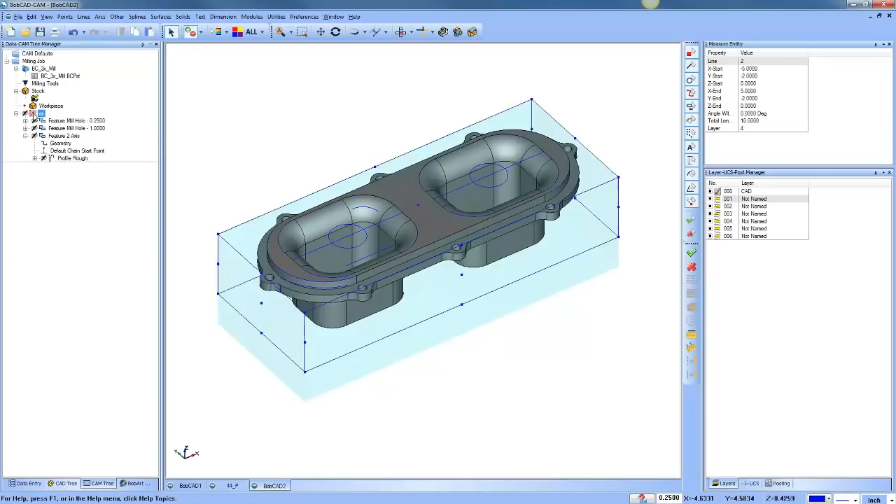All right, let's edit our machine setup location, our origin. Right now it's set to top center. If I want to change it to a different location, I click origin, and then I can use this bounding box. I don't have to click exactly on the point in the corner. I can just click on the bounding box, left click, and it will snap right to the corner. If I click origin and want it in this corner, I move close to that corner, left click, and you'll see it move over to that corner. Does that make sense, Erwin?

You can snap it to any location just by clicking on origin and then using some reference geometry, if I wanted it to be the lower bottom here. Mike has a question. I also have a question about Z-level roughing, lead-in, start points, but we should talk about that outside of the webinar.

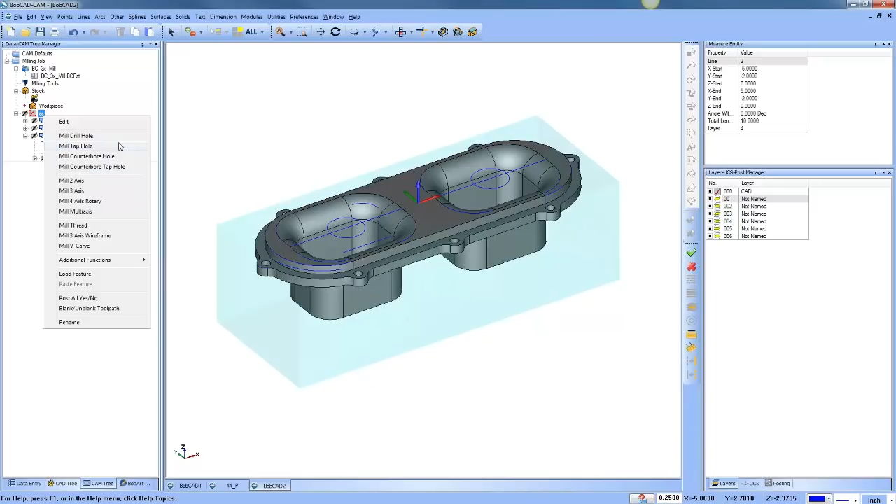So what he's talking about here, let's say, you're doing a chamfer drill and a chamfer mill. Okay, so why can't you drill? These are definitely different categories of tools within the software, a chamfer drill and a chamfer mill, so they're not the same tool type. You would have to use the same tool number in order, even though they're two different tool types, to use the same tool. So that's what's going on there.

I'd like to see more about exactly how you were trying to do that, Mark, because there may be another way around it. Let's see here.

Drake asks, what's the easiest way to compensate for tool wear using an offset? Drake, I think that's a really good question. Can you tell me what control you're running on? Do you have a Fanuc? Do you have a Haas? What control do you have? Let's start there because that will tell me a little more about what's going on.

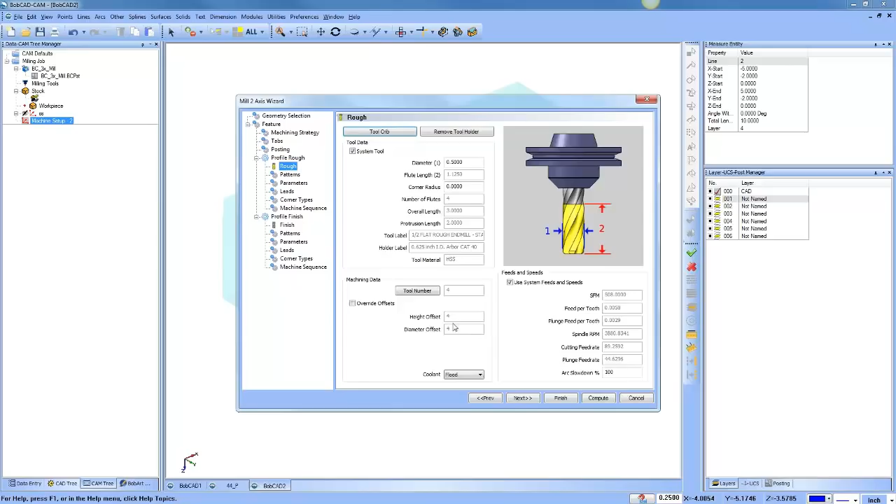And then in the software where it says patterns, you're going to have system compensation and machine compensation. You'll have them both on. System compensation means BobCAD will offset for the cutter. Machine compensation means we'll look at the tool table for that D value, and that D value will be your wear compensation. So that's how that works there, Drake. If you have more questions about that, definitely let me know.

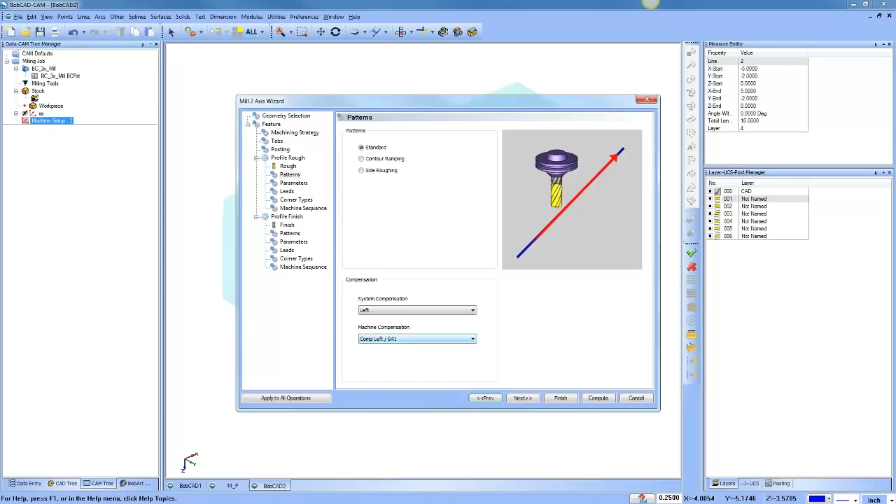Mark asks about extracting to a plane in YZ. If I want to change the plane that I'm going to extract to, what I can do is change the plane that I'm drawing in, and then do utilities, extract edges single, projected Z0. You could pick one of these faces, hit spacebar, and then it will project to Z0 for the active plane that you're on. So I hope that answers your question.

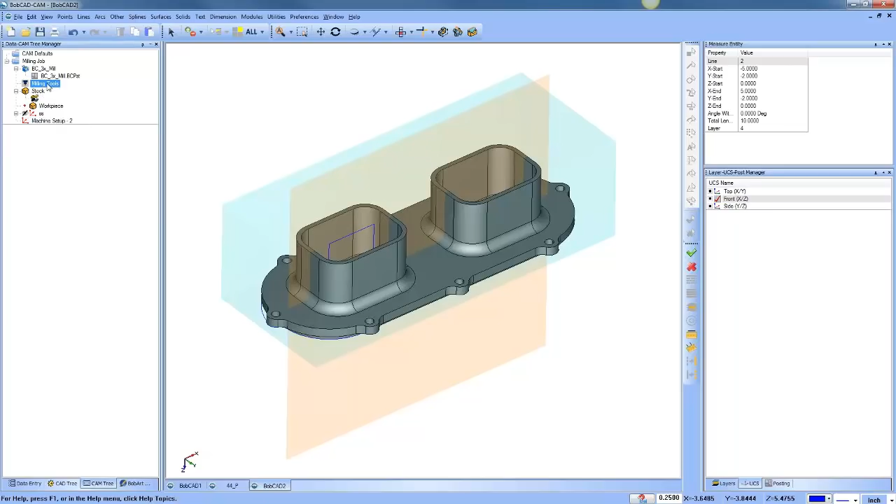Here's another one. The drill mill is an end mill with a drill point, multitasker. Yes, the way that I would pick that one up, Mark, is I would create a custom tool profile so that you can display it as a mill drill. If we go to tools and get into the tool library, I have a couple of them set up. Here's like a V tool, a custom profile. When you're creating your tools, there's an option that says use tool profile, or this one would remove it, but you could use a wireframe profile in order to define your tool, so that you can show it as a mill drill tool, okay?

Dave has a question: I really like to see how you were planning to cut the top two radiuses. I think that's a great question, Dave. There's a lot of ways that we can come in here and cut these top two radiuses. Today's webinar is about 2D milling. We could use a corner rounder, so I guess that would be considered 2D milling, but really when we start to get into these surfaces, we're going to start looking at 3D tool paths to machine them.

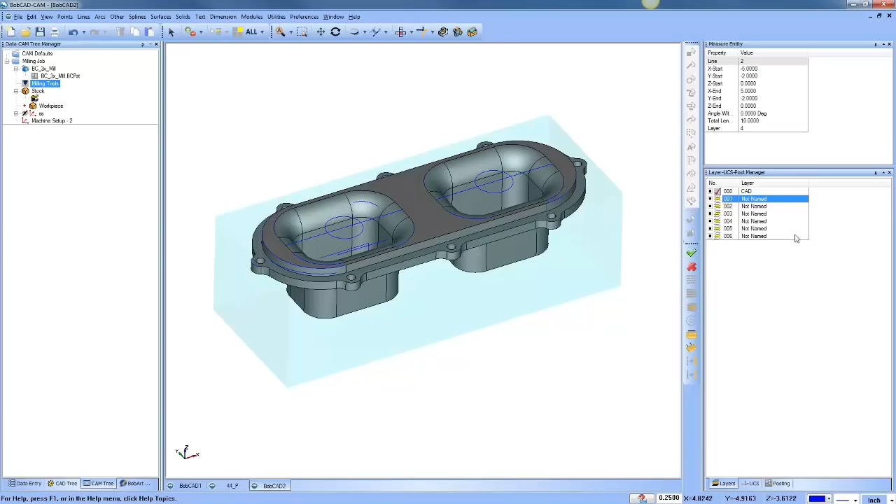There are a number that we can use. It could be a mill standard, mill pro, mill premium. Lots of different options there. So I believe that's what we're going to pick up next week, getting into some of the 3D tool paths.

My version 30 stock wizard only has the rectangle. Others are grayed out. Why is that? Drake, you're probably running the Mill Express software. So if you look at your license and then look at what's available over here, you're probably on Mill 2-axis, which is why you're only seeing rectangular stock.